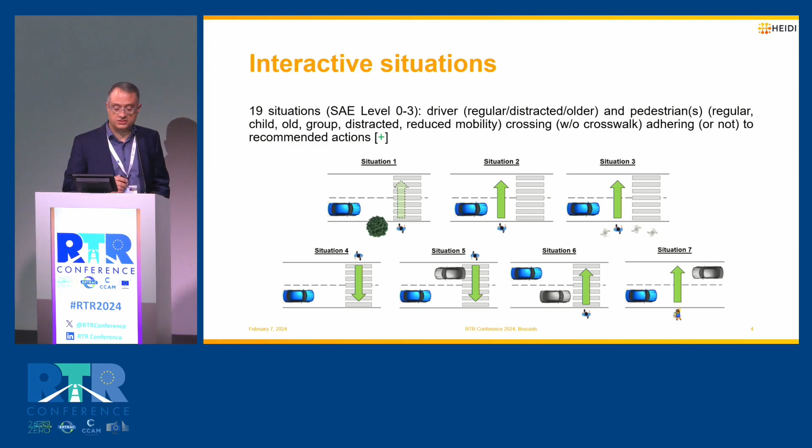So we also give the possibility to the agents to not respect what is recommended. So the system is resistant and resilient enough to be able to adapt and propose a new resolution of the situation. We also have produced concepts of HMIs, and we are now into the phase where we go less from the simulation side and more into the concrete implementation of prototypes. So what you see on the left is the concept for the internal one, what you see on the right is the first prototypes of the external one.

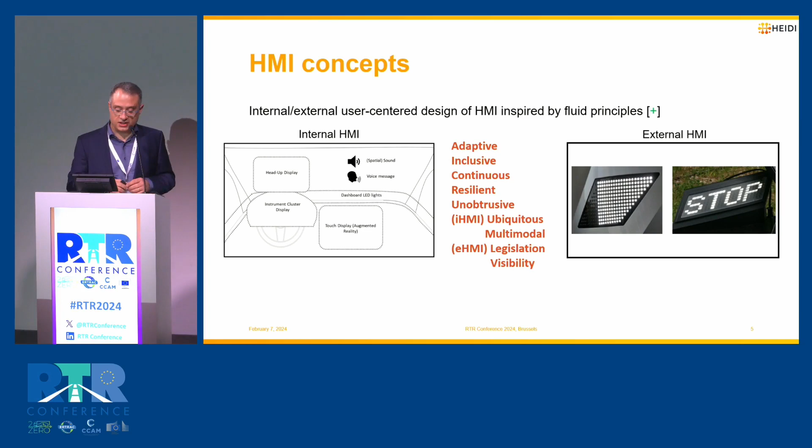Both sides have been designed to respect fluid principles of human-machine interaction. That means that they are all adaptive, inclusive, continuous over time, resilient, and unobtrusive. So they only provide information that is needed when it's needed and only if it's needed. With some differentiations, for the internal side, the system is also ubiquitous. It's a bit all over the place and multimodal. Whereas for the external side, there is a much more strict consideration for what is the current legislation and what might be the future legislations, especially in terms of visibility and reduced visibility conditions.

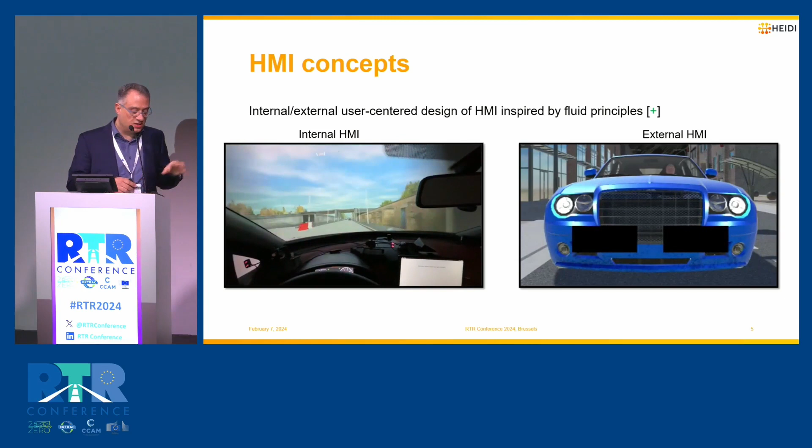Now, here you see short videos that show you the very first stages of virtual prototyping from both sides. So you see the multimodal system on the left for the driver that has head-up displays, LED lights, dashboard, etc. And on the right side, one of the many versions that are under testing of a combination of positions, display size, font size, visibility, etc.

Now, for the cooperative decision logic, so far we were working independently, internal and external side, because we had to understand what are the critical points, what are the critical nodes of the action, and how can each action develop over time, and all the deviations of that. Now, we are at the next stage where we are integrating that into the coordinated system.

So without going into technicalities, we have to take two things into account mostly. On one side, we need to be able to represent in the cooperative logic as many scenarios and variations as possible. On the other side, of course, we need to make it computationally feasible. So we are working on both sides, and we have some interesting results already.

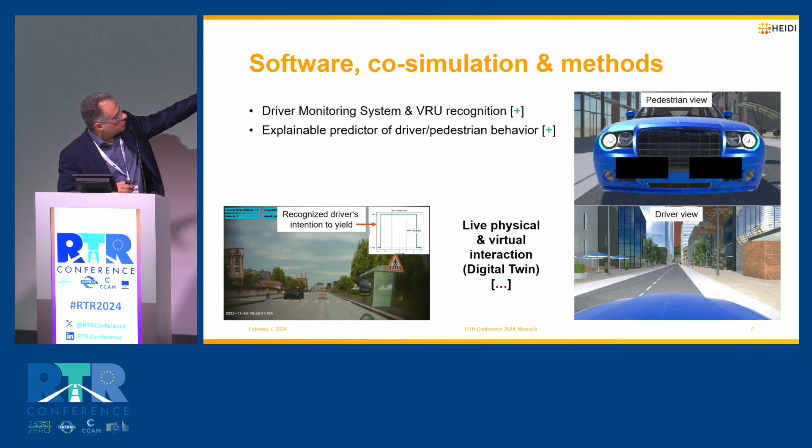Now, also a few words about the development of software, co-simulation environment, methods, digital twins. We have created a driver monitoring system that can not only detect the driver state, but also predict the intention of the driver. And also on the external side can recognize pedestrians and predict the pedestrian intention with explainable predictors in AI terms. What you see on the left side is, in this small corner, the predicted intention of the driver to yield when a pedestrian is about to cross.

And on the right side, you see both versions, the pedestrian view and the driver view. That avatar is actually a real digital twin of one of the project members. And what you can see is basically synchronizing time. When the pedestrian has the approaching car, he sees that the car sends a certain message. The message is interpreted, the pedestrian crosses the street, and the car moves on.

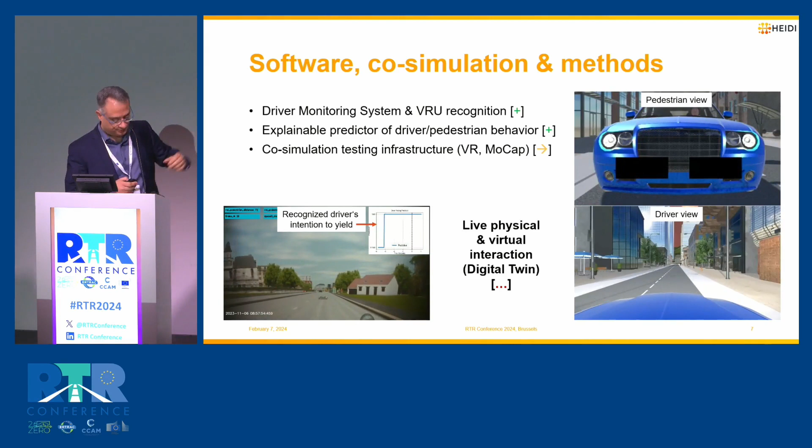Now, we have two more things in terms of software. We are developing the so-called osmotic software layer, that works as a wireless data exchange hub to basically take into account and coordinate all the information completely wirelessly from inside and outside the vehicle.

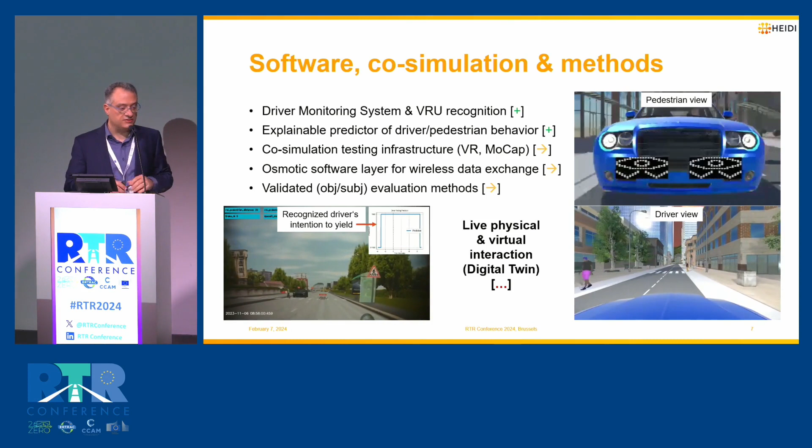And we also have validated some evaluation methods that work objectively and subjectively in both scenarios, so for real prototyping and for simulation environments. First results from a very small sample exploratory study show that we are basically going in the right direction, as we have pretty good subjective ratings of the different versions of interfaces we tested in terms of usability, acceptance, and perceived safety. And also we have objective measurements that tell us that the reaction time when we use our HMI for older or regular drivers is basically halved.

From the external HMI side, we're also well down the path of development, as we have now created a co-simulation setup, which I've shown you in the videos. We are defining all car parameters and refining the messages, especially considering the physical limitations of such a prototype in terms of, as I said, luminance, resolution, font size, etc., which is definitely non-trivial.

Coming to the impact section, dissemination, publication, as of course we are still halfway through the project, we don't have so much in that sense, but we have established a few important milestones. So first of all, we have established a yearly event that is taking place at our premises in Graz, Austria, the so-called Fluid Human System Interaction Symposium. This year we're going to host the second edition in June, so of course you're all more than welcome to participate. We have established an advisory board, putting together members from industry and standardization bodies, including ethics advisors.

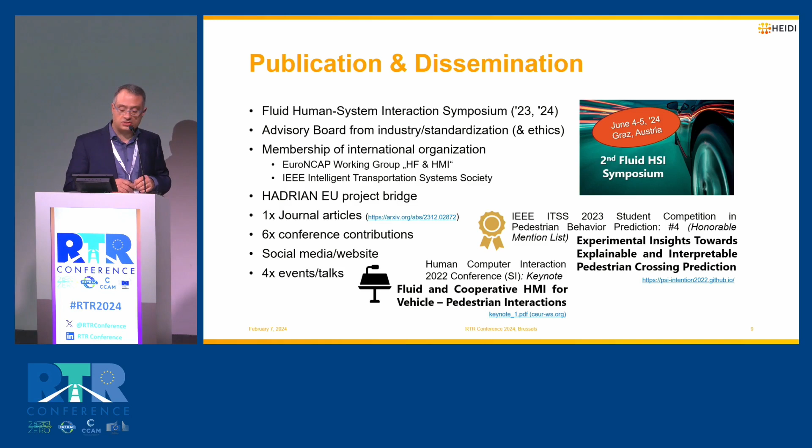A couple of quick remarks. We have an honorable mention of one of our members, University of Alcalá, which was ranked 4th in an international student competition for its pedestrian behavior prediction AI system. And we've also given lectures on the fluid cooperative HMI at the Human-Computer Interaction Conference.

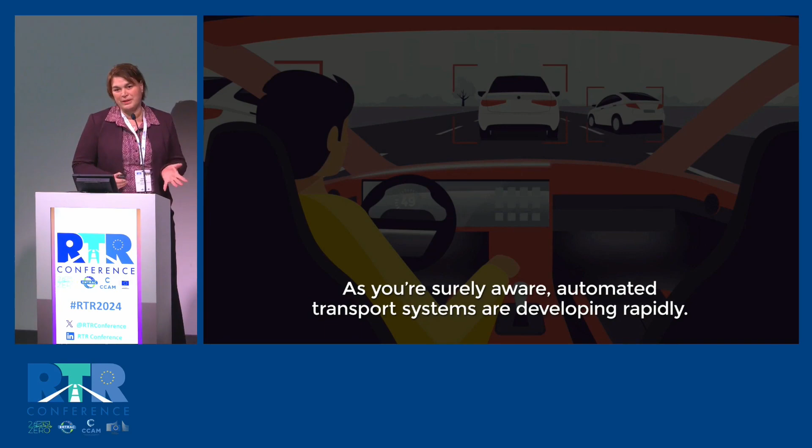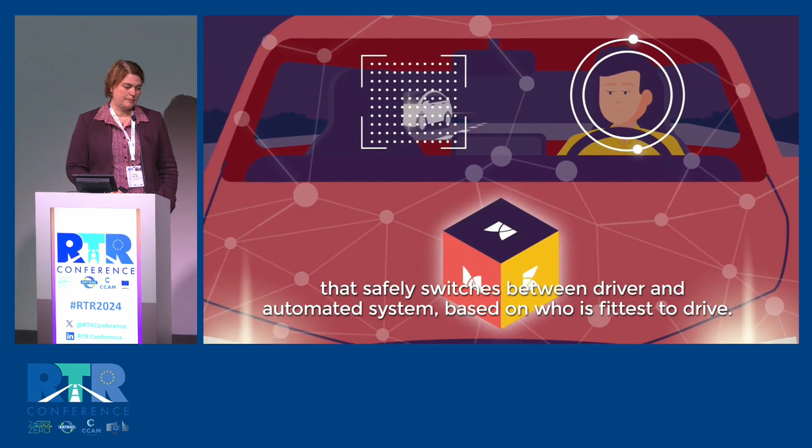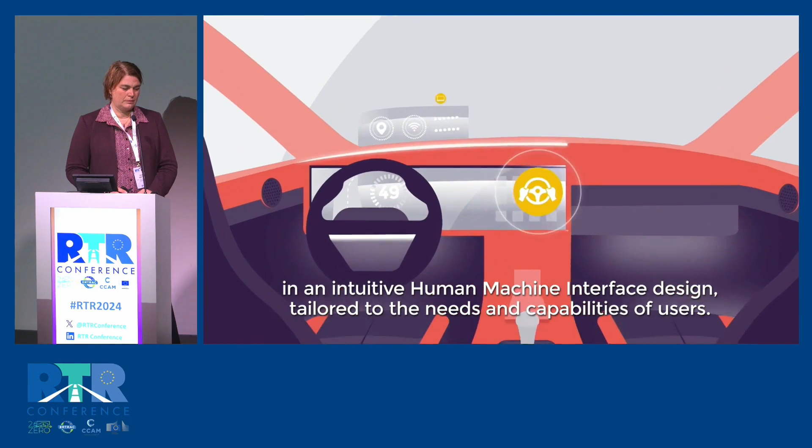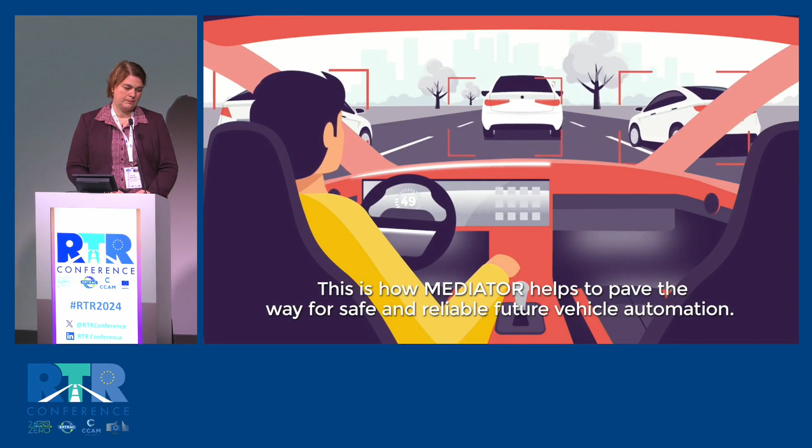As you're surely aware, automated transport systems are developing rapidly. No wonder, automation has the potential to improve the safety, sustainability, and inclusivity of traffic. However, higher levels of automation also introduce new risks, such as mode confusion and degraded performance. This is why a European consortium of highly qualified research and industry transport experts developed Mediator, an innovative mediating system that safely switches between driver and automated system based on who is fittest to drive. Within a 4-year project funded by the European Commission, Mediator has developed working prototypes and validated the system in a number of studies, including virtual reality, driving simulator, on-road studies, and computer simulation. The mediator system continuously monitors the driver and the automated systems and mediates between them while taking driving context into account. Mediator has adopted a user-centered approach, which is culminated in an intuitive human-machine interface design tailored to the needs and capabilities of users. Among others, we did so by supporting the driver's awareness of the automation mode by several cooperating elements, such as ambient lighting and LED strips. And the evaluation results are promising. Moreover, these results from the extensive testing of the mediator system are publicly available. With feedback from industry and policymakers, Mediator has developed guidelines for measuring degraded driver performance, guidelines for safe user-centered human-machine interface design, and roadmaps for further exploitation of the system. This is how Mediator helps to pave the way for safe and reliable future vehicle automation. More information, please visit mediatorproject.eu.

So that's in a nutshell, an overview of the project. For this presentation, we kind of reviewed all the results, and there's a lot after 4 years of hard work of so many partners. And we thought for this presentation, it's probably best to use the opportunity to share some of the main concepts we've been using that we feel, based on our experience, are worth taking further beyond the project, so maybe people can benefit from it.

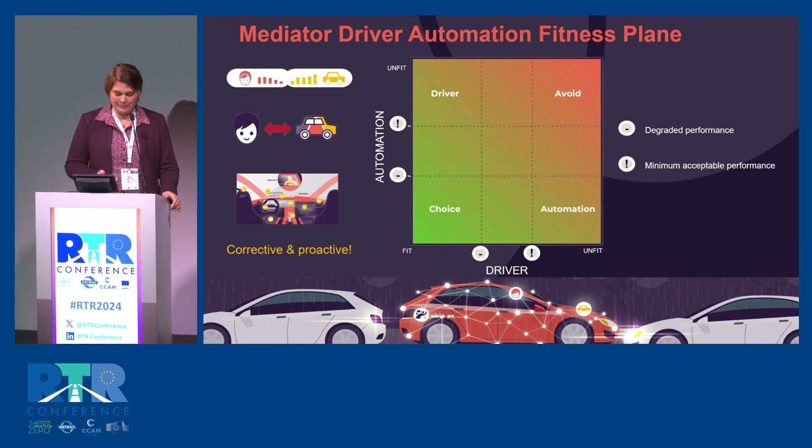And within that approach, we looked at corrective action. So when you see a driver is degraded, what can you do to kind of wake up this driver? But we also tried to find some preventive actions, to be proactive. If we know this is a condition where a driver is usually prone to fatigue, let's try to see if we can engage the driver already to prevent the fatigue from happening in the first place. So this is one of the main concepts underlying our mediator project.

So for today, we decided to focus on one of them, and we chose to focus on the holistic user-centered HMI design. So I will share some of the results from that area.

To start with, when we started thinking about this human-centered HMI design, we found it really important to take a holistic approach. So we think in this transition, what's really needed is to go beyond adding an extra icon on the dashboard. We should really take a holistic approach and look at the integral experience of the driver and use all the senses and opportunities. Well, not necessarily use them, but explore the use of them and see what would be the best combination to communicate what we want to communicate.

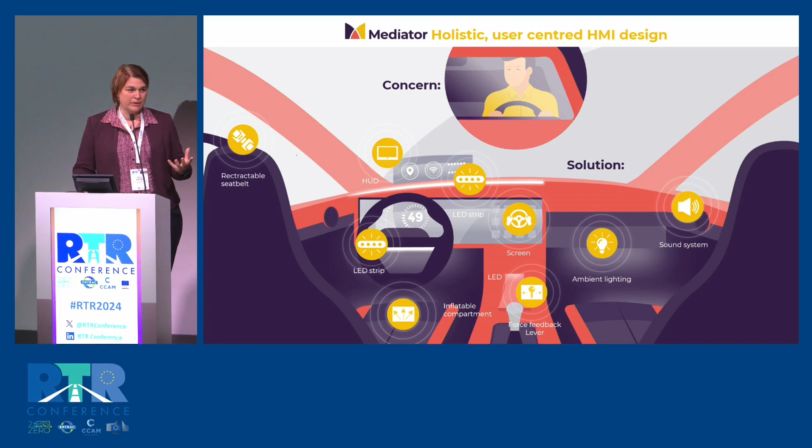So there were two key concerns that we found most important to communicate to the driver, what we think is most challenging in this transition. Because what we will see is that there will be different modes available in the vehicle during one trip. So therefore, it's very important that at any time the driver is fully aware of the mode he's driving in. And also the transition between the modes needs to go really smoothly.

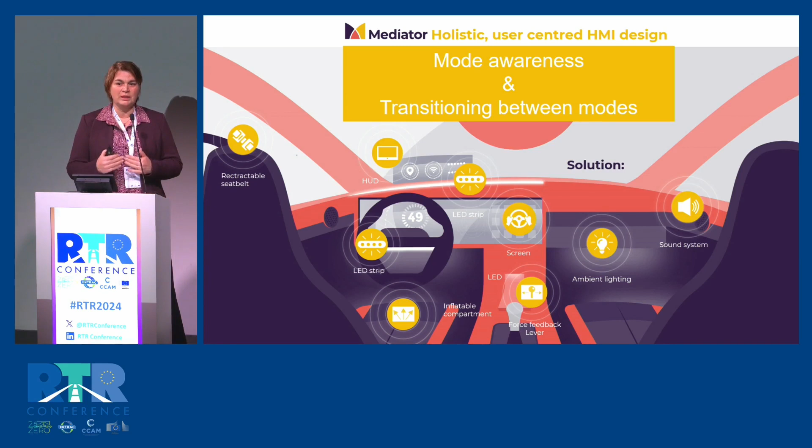So it's really technology-driven in a way that it clearly defines the steps of technological development and how new technology is introduced step by step, and how step by step also the role of the driver decreases. It's really taking the perspective that the driver does, let's say, the rest, the remaining task. But this remaining task is not necessarily what we as drivers are good at, or that we find convenient. So within the project, we thought we have to take the driver as a starting point: start with the driver skills and limitations, and see how technology can support.

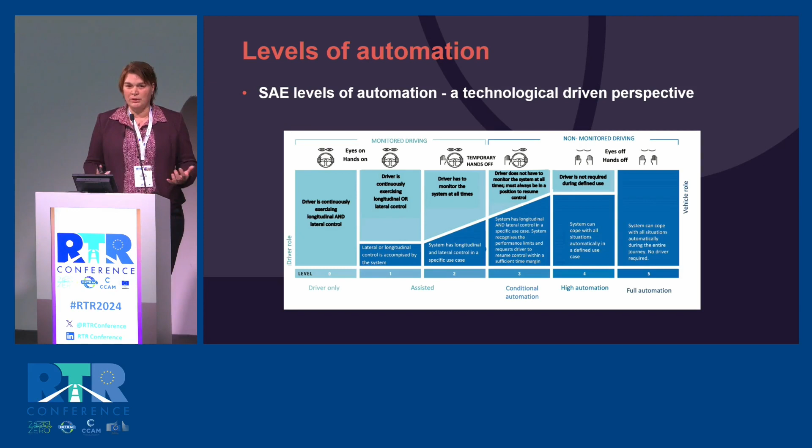So we thought it's good to focus on the development of an intuitive user-centered interaction and really take the human perspective. So the human has been the starting point, and from there we tried to define what's really most important to communicate to the driver. So from there we developed the MEDIATOR driver mode, and there were two key elements in this driver mode. First and foremost, it's most important that it's communicated which mode the driver is in at a certain moment in time, and what requirements are connected to that driver mode.

And there we thought actually there's only one clear distinction: either the driver is responsible in the end, or the automation is responsible in the end. In the first condition, where the driver is responsible, there could be all kinds of levels of support by ADAS kind of systems, but it should be clear that in the end, the driver is responsible. A second important thing is when the automation is responsible, the driver needs to know for how long this condition is available. That's what we call the time budget. The time budget indicates for how long the automation is available.

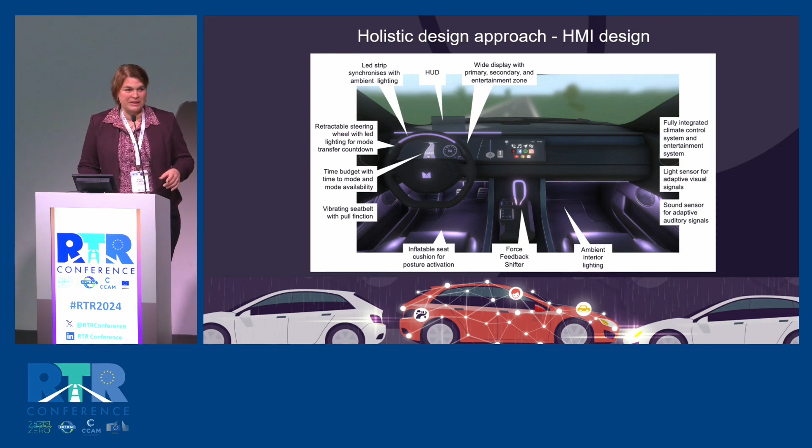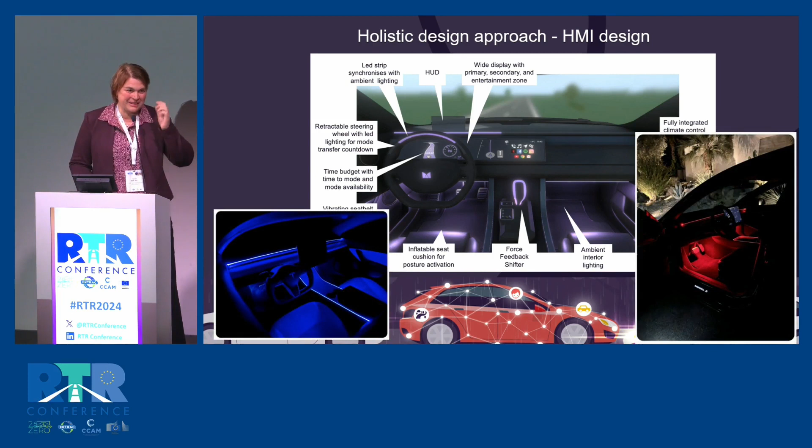It was also interesting that last week a friend of mine sent me a picture. She said this is the new Tesla Model 3. So it was interesting that there was very much a similarity actually between, well, their solution and our solution.

To develop the user interface, we took a design approach. So this is also what I think was really original, and also something that I think the field could benefit from more. So we started with the human factors knowledge that we have in the field. And then we asked the designers, based on that knowledge, to come up with creative solutions. And we did some, let's say, co-design between the designers and the human factors expertise.

And in different iterations, in the VR setting, we developed prototypes. And when we felt that was kind of mature and all the human factors knowledge was well integrated in this first prototype, we did further co-design sessions with the users. So we exposed the users to the interface design, and we asked them to think out loud how they interpret the different signals.

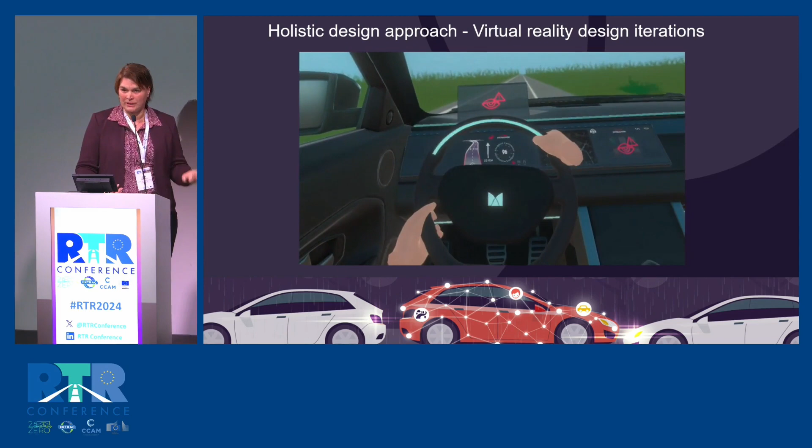And based on their thoughts, we could see to what extent our user interface was being understood, and we could adapt it. And in a couple of iterations, we could work towards a satisfactory understanding of this design. So this is one example, and well, I could talk for hours, but I only have 3 minutes left.

So we implemented all the developments we did in 2 driving simulator studies, 2 on-road testing studies. We did a VR study and we did computer simulations. And with all of those results, we did, let's say, a comprehensive evaluation of the concept and the implementation.

We learned that in terms of impact, we think this MEDIATOR concept is a significant step forward towards a safe transport system. It leads to a reduction in crashes, and we see a decrease in distracted driving, we see improved mode awareness, we see enhanced takeover rituals, we see support for drivers in self-regulation, and also mitigating the impact of fatigue. And overall, we got really positive feedback from the different participants, and we expect high acceptance and usability scores.

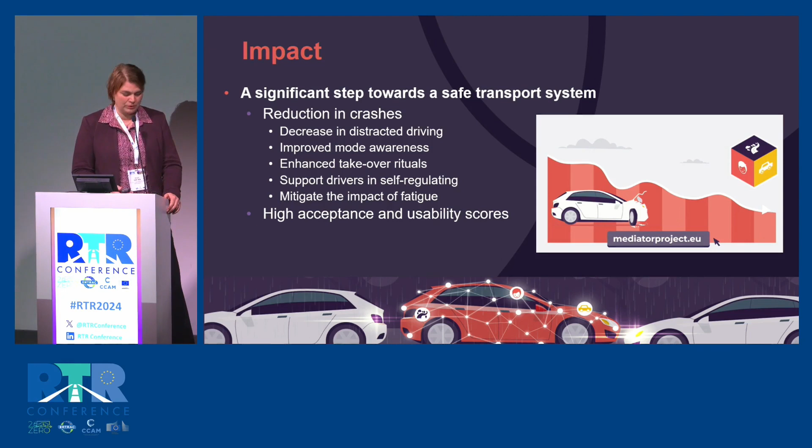So in conclusion, there's 4 main concepts that we think are worth further consideration. It's the MEDIATOR fitness plane, it's the MEDIATOR system concept, it's the MEDIATOR driver modes, which I think is a first step towards development of human-centered driver modes, and it's the holistic design approach and the iterative approach there.

So one final remark, also what we found during this project in the discussions between ourselves, there's really a need for changing perspective. Like I said in the beginning, the automation has much to offer to our society. It has the potential to increase the safety. It has the potential to increase sustainability. And it has the potential to increase inclusivity. But it's not bringing us there necessarily.

So if we want to get there, we should focus on these societal goals. So we should go from a transition which is driven by technology to a transition where the societal goals are driving the technology. So the societal goals should be our objective, and in the end, this technology is a means to an end to get there.

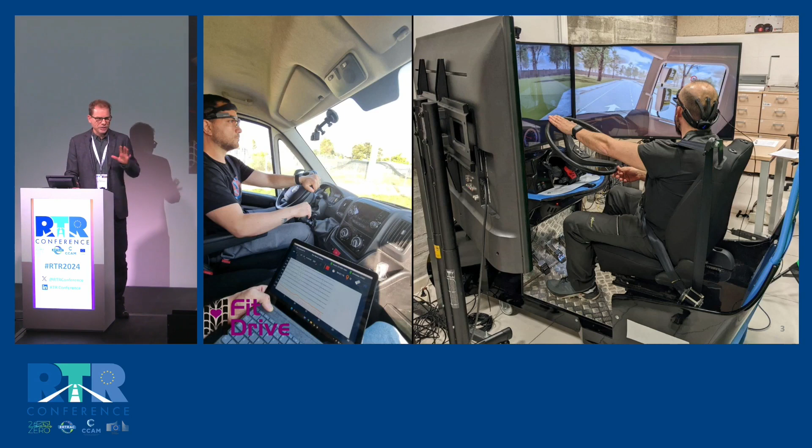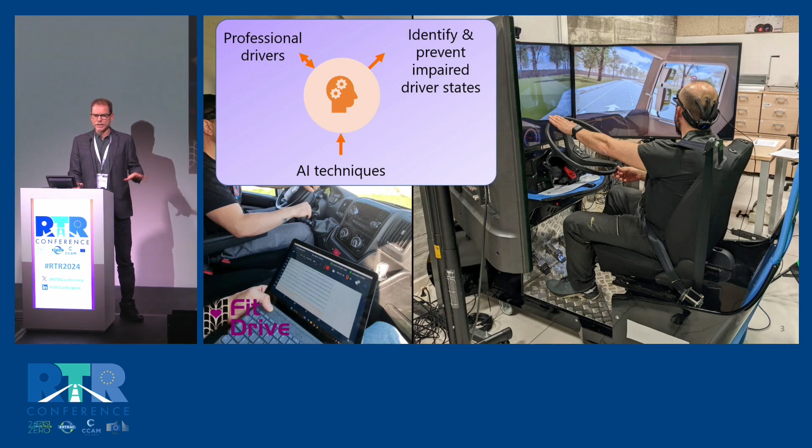So, quick view into one pilot, to set a bit what we were working on. You see a van driver with loads of sensors there measuring how he is driving, and also a simulator of a truck, in the same setting in a virtual mode. So we focus on professional drivers, mainly on van and truck drivers, as you just saw. We try to identify and eventually prevent impaired driver states. And we use AI technology to analyze all this.

So there are driving tests in simulators, also on the road on test tracks. And there's quite some literature out there, of course, on impaired driving states. We'll use this and then make a profile of the usual daily driving style of these drivers. And then, with the AI techniques, we can detect when a driver gets out of this personal driving style, which is an indication for impaired driving.

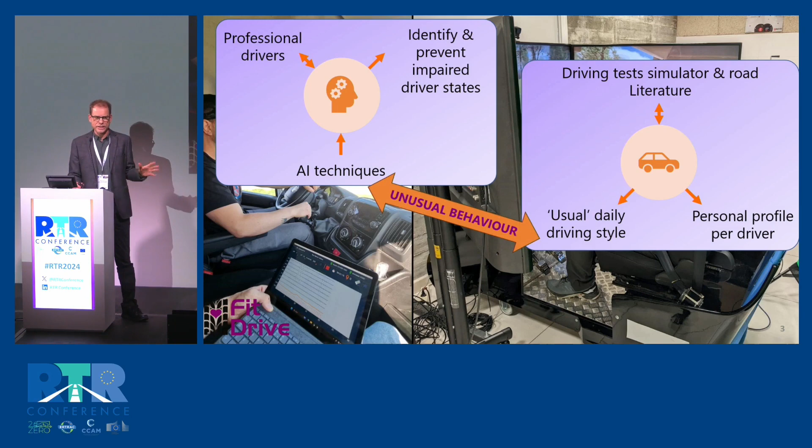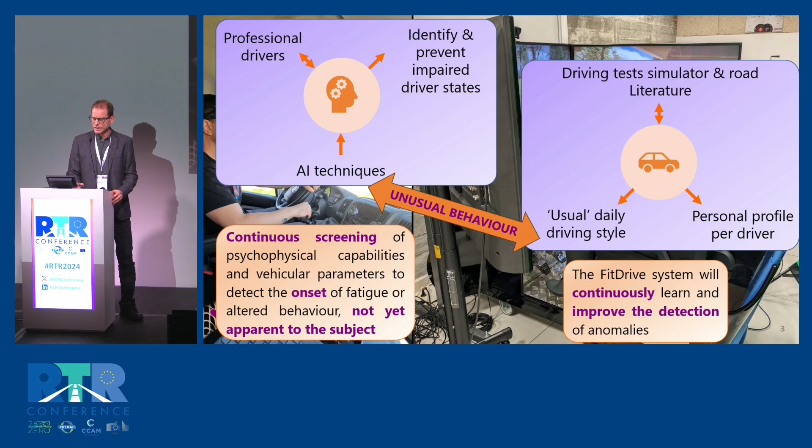So the system will then do continuous real-time screening of psychophysical capabilities and vehicle parameters, give an indication of the fitness to drive, to detect the onset of fatigue and other altered behaviors. The onset, so even before the driver notices drowsiness or whatever, we try to find some indicators to detect it very early and in a personal manner. And the system will then continuously keep on learning and adapting to changes in usual driving style to improve the detection of impaired driving.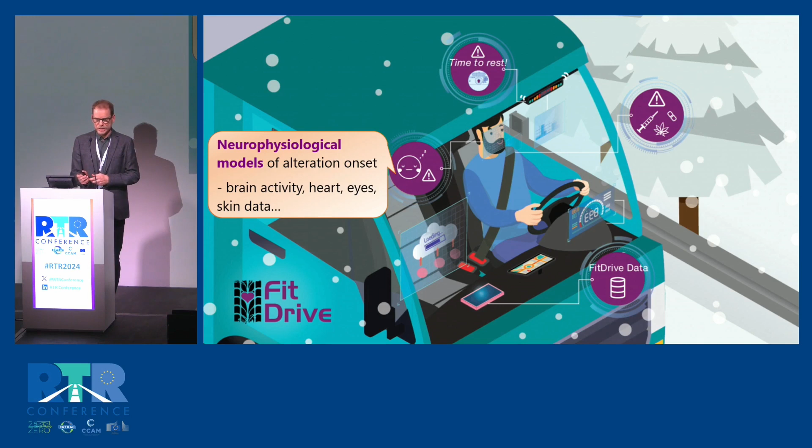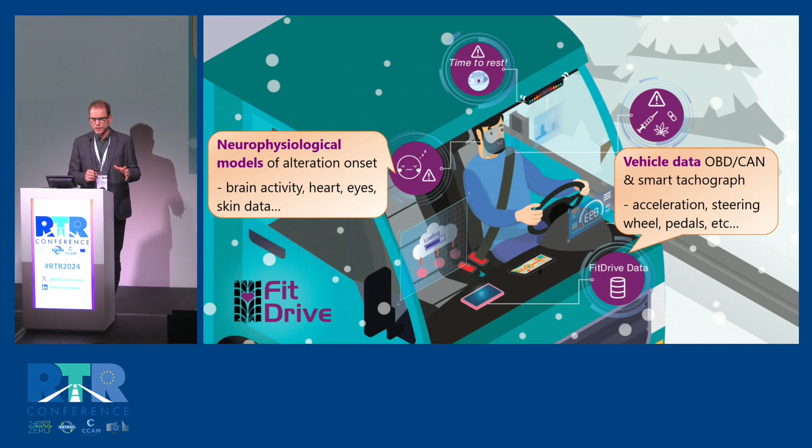So different aspects of the FITDRIVE system. There's neurophysiological models of the onset of these alterations with data from brain activity, from heartbeat, eyes, skin data, the sweating, vehicle data: OBD port, the CAN bus, and a smart tachograph, which is also being developed in the project, with indicators like acceleration, position of the steering wheel, the pedals, and also much more sophisticated parameters from the vehicle. There's a cloud-based AI system to detect these altered conditions.

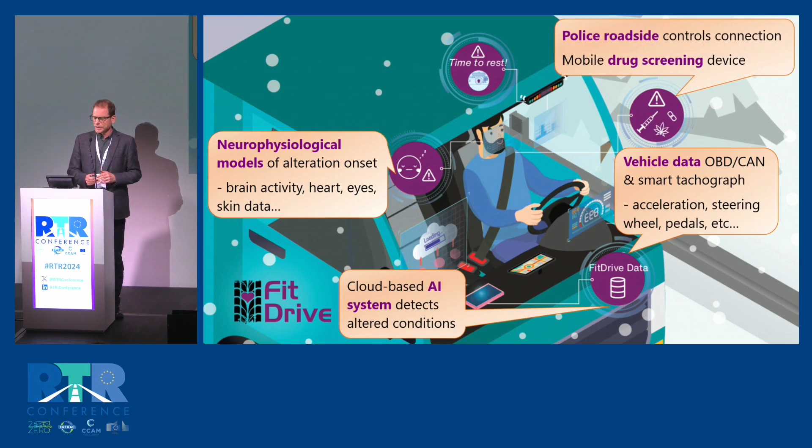And then there's, through the smart tachograph, a connection to police roadside controls. This can help the police to communicate with the vehicle and receive an indication of the current fitness to drive of the driver, so they can select which vehicles they want to stop and check. Another development is a mobile drug screening device for very quick detection of drug use, also used by police roadside controls. And we aim at contributing to the standardization of different levels of fitness to drive, and pave the way for fitness driving assistance systems.

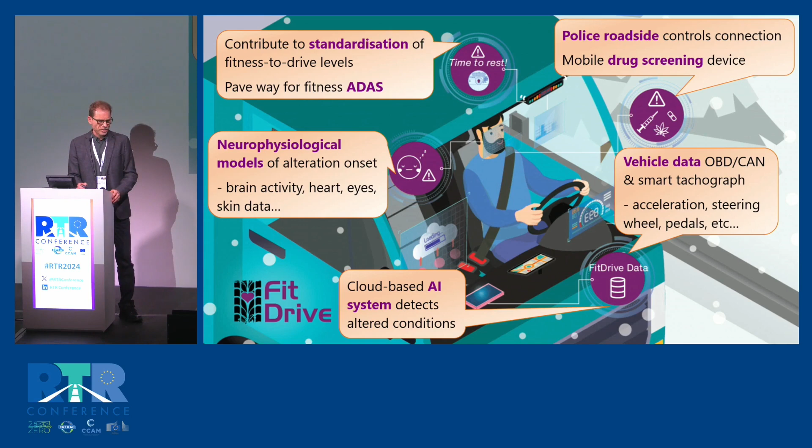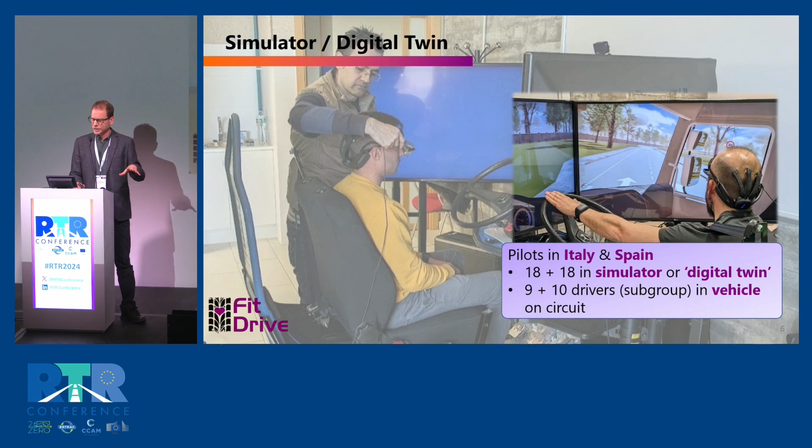So some preliminary results. As for a simulator and digital twin, you can name it like this as well. We can discuss about that, but okay. So we did pilots in Italy and Spain, in Rome, in Burgos, and in Leon in Spain, with 18 participants in each site in the simulator, and then on a test track on a circuit with actual vehicles, vans and trucks.

And this was a subset of the participants in the simulators. So the virtual circuit in the simulator was an exact copy of that circuit. We used 2 ITCL simulators there, coming from the SimuSafe project and the Mindtooth project. One was used for the van, and the other one was transformed into a truck simulator.

So, in these settings, we collect this data triangle, we call it. Actually, in the MEDIATOR presentation, we also saw a very similar thing. So data from the user, from the vehicle, and from the environment. We try to keep the environment as constant as possible and really focus on users and vehicles. The environment has, of course, influence on the state of the driver. At night you get tired more easily, but that is a cause.

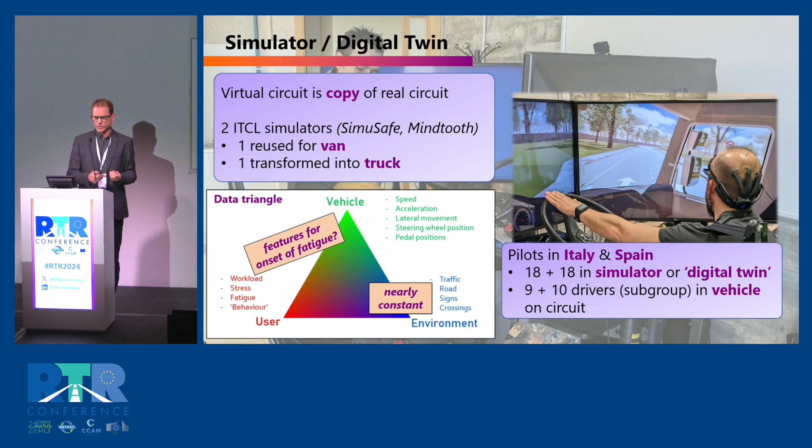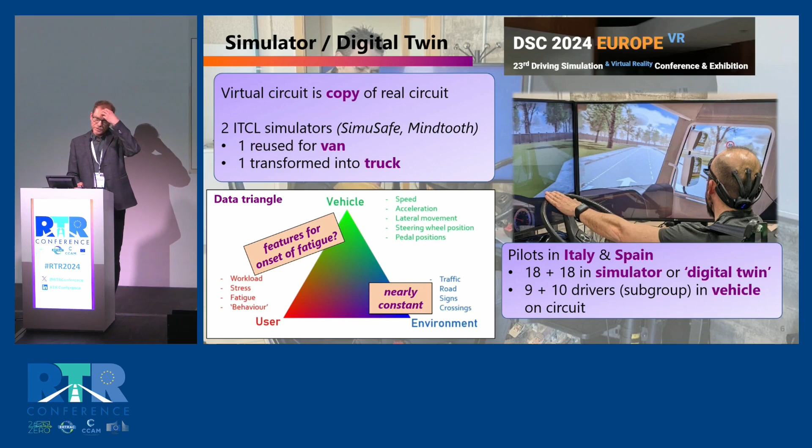And the symptoms of actual impairment to drive are noticed in the behavior of driving, and so data from the user or from the vehicle. Okay. So this is where we look for this onset of fatigue. And next September in France at the DSC, the Driving Simulation Conference, we will present this simulator and this data collection system.

Okay, so current status and some preliminary results. So in the tests for fatigue induction, we were able to do this. Actually, in the simulator in Italy, one participant fell asleep. We heard a bang of the head on the steering wheel, and he actually fell asleep during the test. So this worked very well. We saw that the EEG signals, the brain activity, is very good, gold standard. And it delivers a ground truth for your AI on what is fatigue.

And with input from literature as well, we try to correlate different features with parameters that you can obtain with non-invasive sensors. You don't want a truck driver with an EEG on his head driving all day, of course. So if you can relate it with heartbeat, for instance, then you have a smartwatch or a steering wheel with a heartbeat sensor in it, and you can use that one. And then from parameters that we have, make a selection of which features can give us indications on the onset of fatigue or other impairments.

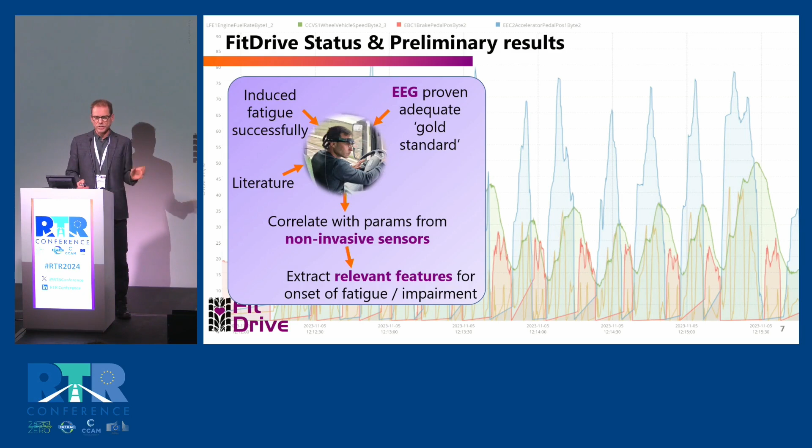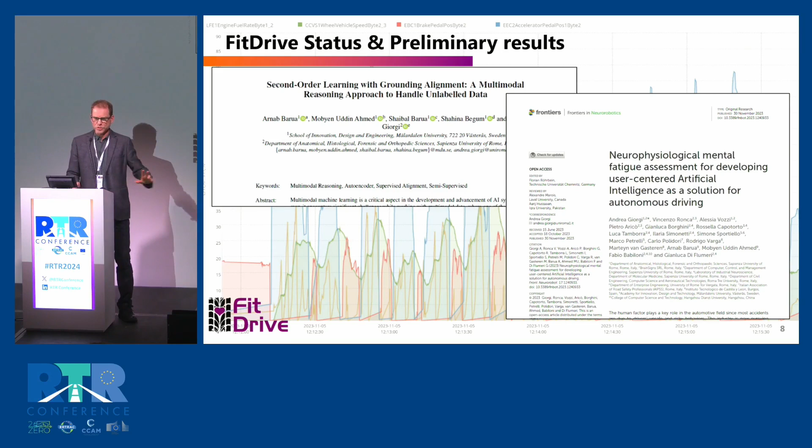So what is still coming up in the coming year is the personalization pilot. So we have drivers, new drivers, driving for 1 month in Italy, Spain, and also Ireland in this case, and do tests on the detection of unusual behavior. So this is work in progress for the coming year, as I said. And so far there are several publications already on this AI modeling we do, the neurophysiological measuring of mental fatigue.

And something we stress a lot, we work a lot on, is the need for standardization here. We need common criteria to measure reduction of fitness to drive. This is a message I want to convey today. This exists already for alcohol. You're allowed to drive with a certain promillage of alcohol in your blood. This does not exist for fitness to drive. So we need to have a good measurement and define what levels are allowed and not.

And put a mark here on the countries. For alcohol, there are different laws in every country. If a truck driver goes from one country to another, he faces different legislation, which we should try and avoid and have a common, at least European, standard on this.

So, most probably this will not be one measurement, like with alcohol in your blood. It will be several features, and then you can think of, if it turns out to be 5 features, you see this blue area, which is the allowed area. The yellow line would be a measurement of the current driver state. One value is outside the blue area, so this means some form of impairment.

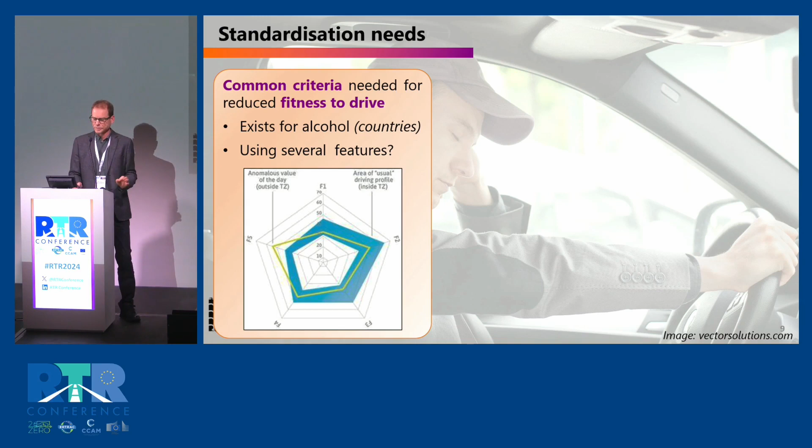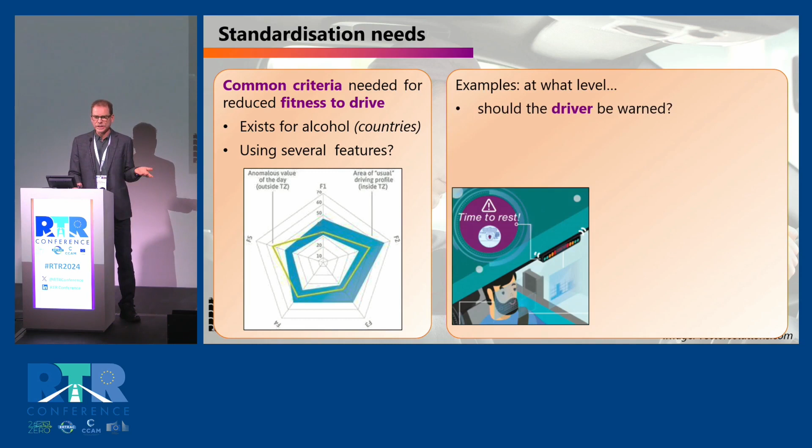So, some examples of the use of this fitness to drive standardization, what levels are allowed. Of course, the driver must be warned if fitness to drive is reduced. Also, police roadside controls, I mentioned already. The police need to know at what levels they should take action, stop the vehicle,

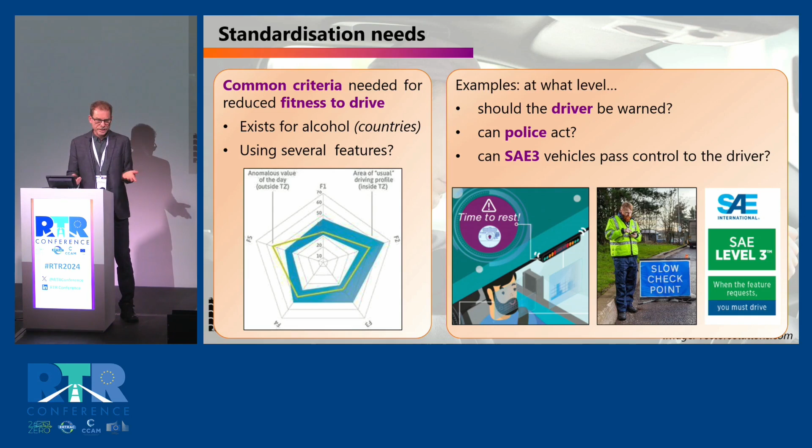or fine him or whatever. And also in automated vehicles at level 3, we saw before, so that the vehicle can decide to give the control to the driver. The vehicle must then know what the fitness of the driver is before; perhaps it should stop the car instead.

So, actions we've taken to promote these standardization needs. We organized 2 meetings at the European Parliament. They are working on the new driver license directive right now, and this includes fitness to drive. So we had discussions there. We conveyed the message, and well, we're a bit proud to have been there. Actually, it's very good.

Also the EUCAD exhibition in May last year, which was focused on automated driving, of course. TRA 22 in Lisbon with our sister project, Panacea. This is where we shaped this idea of standardization and driver interaction. We organized a side event at TRA 24 in April, a stakeholder event there, okay?

So, expected mid to long-term impact. Eventually, for professional drivers, we'll have AI models and a solution for detecting individualized onset of reduced fitness. And also, there's this new drug screening device, which has very quick measurements in less than a minute. Currently it's between 5 and 8 minutes to have a drug test, so this is a good time win for the police.

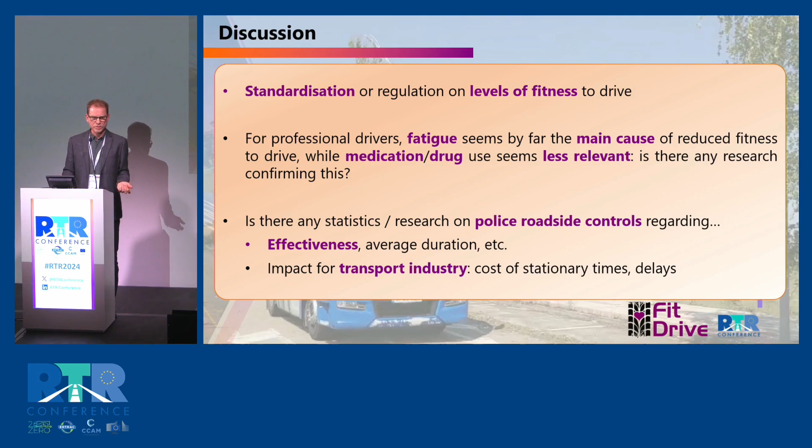Thank you very much, Martin, and thank you to all speakers for having kept their time. It means that now we have a sensible amount of time to discuss with you, and for this I will give the floor to Magnus. Thank you very much. Now we've seen different aspects related to the human factors. We've touched on this from various angles, and I hope that you are all fit to ask some questions, because that's really what we are here for now. So who would like to start? Let me see some hands, please. Yes, we have several hands. Do we have a microphone? Yes.

Yeah, thank you very much. I'm Jack Hotzinger, Toyota Motor Europe. Thank you for the presentations in the early morning. I have a question for Paolo on the HEIDI project. External communication to vulnerable road users, mainly pedestrians, I guess you were showing here. My question is, do you plan user studies on that? How it is perceived, how effective it is? Do you think about KPIs? Do you have practical design guidelines or something? Sorry, three questions in one. Maybe your picture.

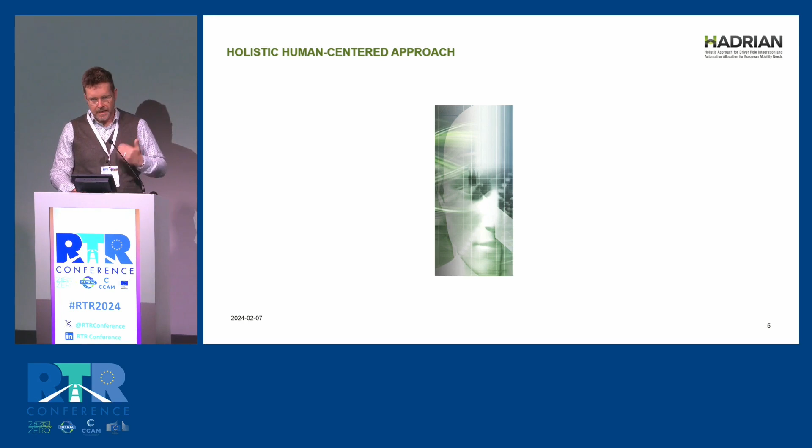So we start with the mobility needs of humans for automated driving in the near future. Then, of course, the vehicle has a critical part. In-vehicle solutions, HCI solutions, driver monitoring solutions are investigated in the project. But then, and this is really the key for our holistic approach here, we also integrated the road infrastructure, especially information about what is ahead of the automated driving vehicle,

communicating this to the vehicle itself through sensors, through C-ITS messages, and in this way expanding the prediction horizon, the viewing horizon of a vehicle, what the vehicle knows is coming up, and in this way increasing the predictability and also the availability of the automated driving functions. So we think that all three of these aspects together give us much better answers than just some of the components. So this is our HADRIAN, which stands for holistic approach, and the long text you have there.

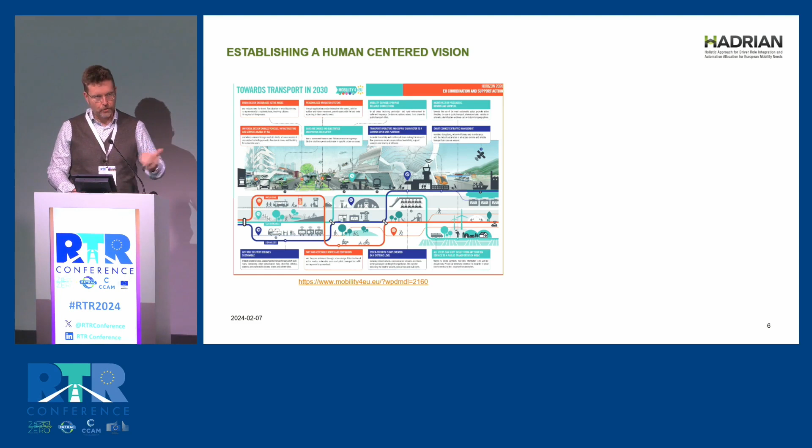So we start with the human-centered vision. This is our crystal ball. How will automated driving be usable in the near future, in the next 5-10 years? There are many visions available, many ideas, roadmaps where the European Union, where Europe, where countries and cities want to go. We read many of these visions and extracted from these visions specific use cases. So it's a user-centered approach. We have personas involved. We identified 3 different personas.

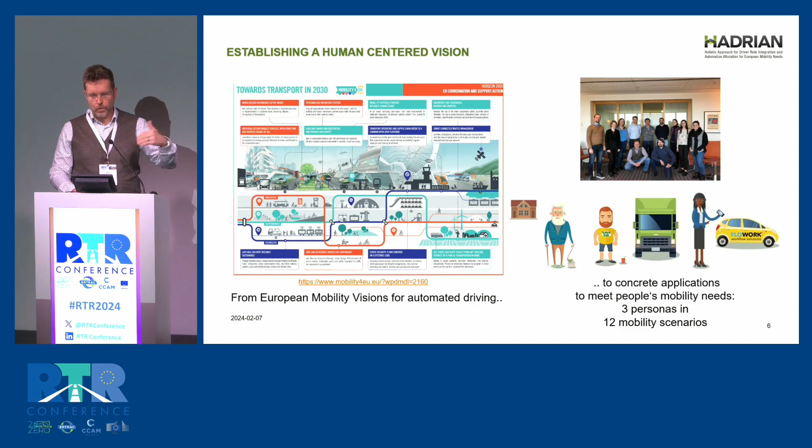One, an elderly driver who wants to stay mobile with automated driving functions. We have a truck driver, because the job as a truck driver is not as attractive anymore as it used to be. So how to increase the attractiveness of this job environment. And then somebody who wants to work in the vehicle, somebody who needs to be productive while being on a trip. So these 3 personas form the core extracted from these mobility visions.

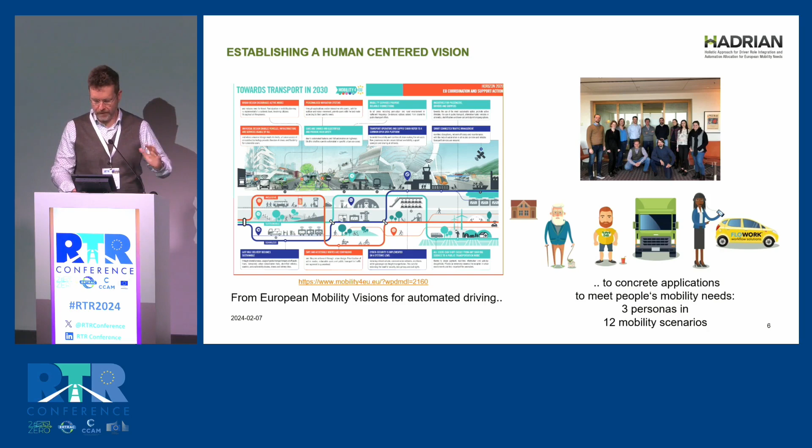And then for this we created 12 mobility scenarios. These mobility scenarios were extracted for urban environments, suburban environments, rural environments, and also ride-sharing environments. So these 12 scenarios really form the backbone of the project, because they give us the goals, what the mobility needs are, and how we can address them with these different types of automated driving functions. So this was the start, at the very beginning. Now this is at the end.

Most of the research in the HADRIAN project, but not all, since in the end we come to the field demonstrations, was conducted in driving simulators. We had overall 22 studies across Europe and Turkey with more than 800 human participants. And we described thoroughly all these studies, which are available on this link, and you will have other links later on where you find them. But what did we do?

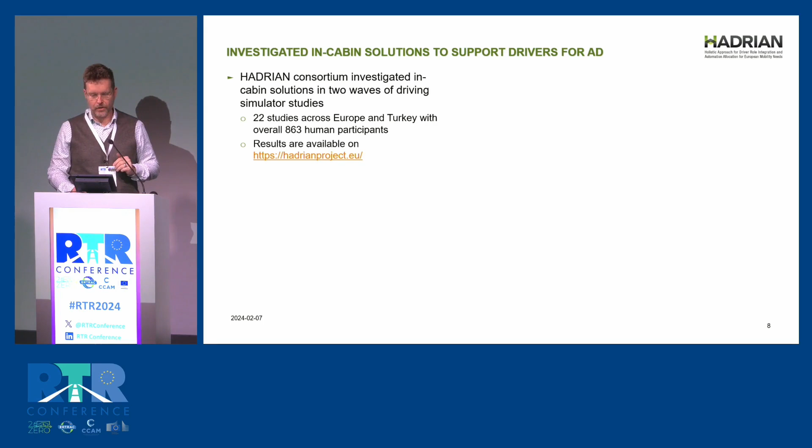So just some highlights. One is we looked at seat repositioning as one way to communicate a change of automation level to the driver. We found this to be very intuitive if you do it right, if you have the right angle. For example, we tried seat inclination, but seat inclination didn't work so well. So a seat angle of about 15 degrees was found to be a very effective way, if integrated with other solutions.

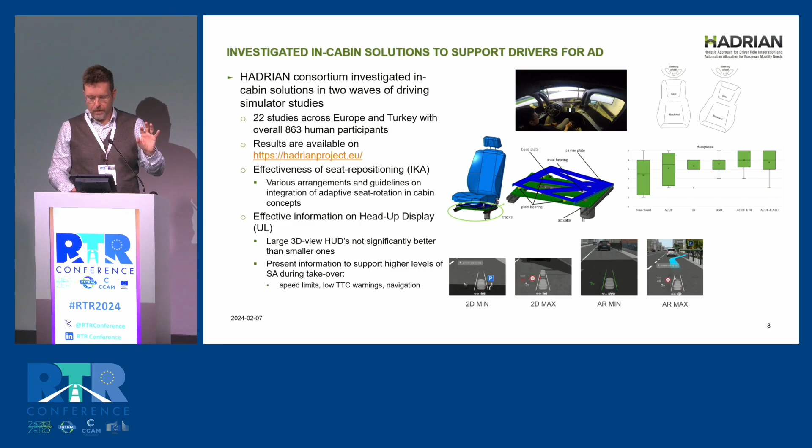You can't just turn the seat, of course, you need to integrate it with other display solutions, especially auditory alerts, and so part of what we tried to show is how you can integrate each of the single innovations, here seat rotation, into a comprehensive cockpit layout or vehicle cabin layout. A second piece we looked at were head-up displays.

Head-up displays are becoming, of course, available more and more. It's prime real estate for seeing information, getting information. We were interested in some of these large augmented reality type displays where you have information that actually overlays into the real environment and seems to really augment what you see out there.

We didn't find, interestingly, such big benefits of having large head-up displays that have this integrated view. We found head-up displays were highly appreciated, especially the information you see there: speed limits, time to collision warnings, and navigation information. So we investigated what information was most beneficial to be displayed, as the minimum, on such head-up displays.

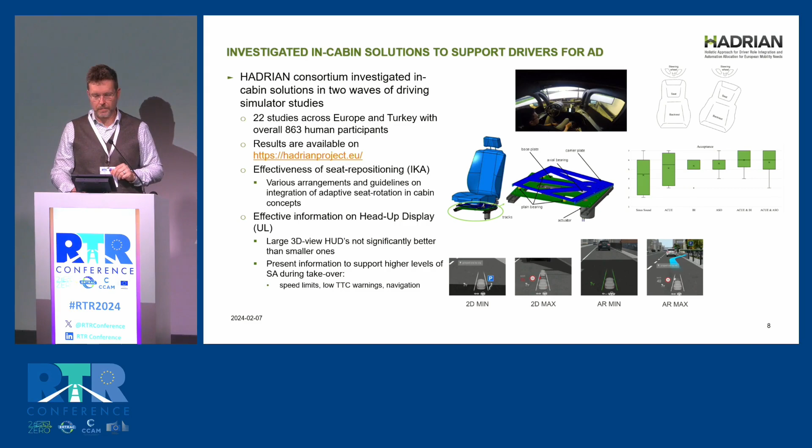We looked at different driver state-dependent haptic feedback, looking at different signals that can be communicated from the steering wheel, for example, a state change for a takeover request and so on. What haptic symbols are most intuitive to be perceived, to be used by our drivers? And lots of possibilities out there, from intensity, the shape of the signal, and just different ideas. It's an almost infinite universe. So we looked at a lot of those, and we found some that clearly work better than others. And so we reported on those, and we used them then in follow-on simulations.

What we also did, beyond haptic displays, and this is a use case you can think of for an elderly driver, we called it the guardian angel assistant. So it's really a vehicle that has automated driving functionality, but uses this in the background, leaving the driver in manual driving mode. So an elderly person may not necessarily need to disengage from driving, but needs to be supported maybe in some situations to compensate cognitive, motoric, maybe some decrements in performance.

And so there we developed this guardian angel adaptive force feedback on the steering wheel that adjusted to the level of the driver, giving strong force feedback, avoiding an obstacle when the driver was distracted, being less strong when the driver was attentive. So it was driver state-dependent interventions in terms of keeping a safe envelope of the vehicle.

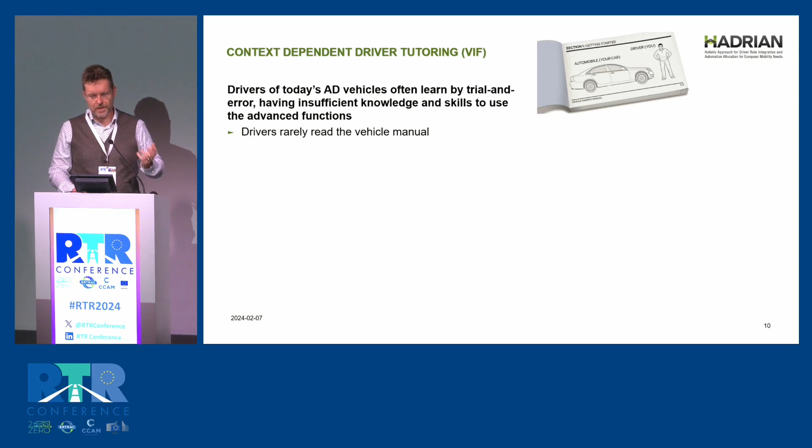What we did to address this, we developed a tutoring application that on one hand explained in a multimedia format, so in videos and audio, the responsibilities, the tasks of the driver, the tasks of what the vehicle does, when it does it, how to engage, disengage, and so on.

But even more important, and maybe the most important feature of this system, was that it was combined with the in-cabin driver monitoring system. So it was able to adjust to what it observed the driver to do.

So a driver, and we heard this yesterday, when the driver was too quick in taking back control, because it was just a 2-3 second fast response after a takeover request, the system would afterwards explain to the driver, okay, good, but next time, please check the rear view mirror, look outside, and learn to do this in a safe way.

This would be in the initial tutoring already, but this would be adaptively giving feedback to drivers. We were a little concerned, would drivers really like that? But in fact, when we gave this dynamic feedback, only the drivers who did not perform this takeover in a safe way, or at least timely in a safe way, would get the feedback, so it would not annoy them after a while, so this was important.

They changed their scanning behavior, so during the takeover they looked much more outside, on the road itself, so they focused more where they should focus during the takeover. But they also gave us feedback that this helped them reduce ambiguity, because they received feedback from the system on whether they were doing something right.

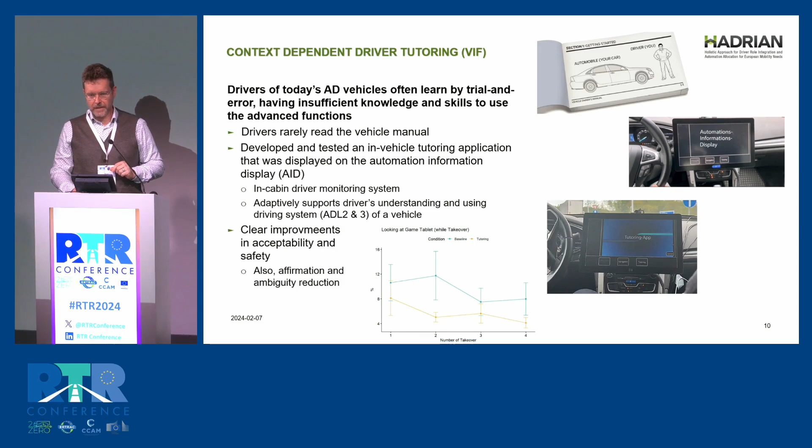Now let me go to the HADRIAN demonstration. I must say, I was very glad that it was a requirement in the call that we had to not only do the research in our simulators, but actually bring them into the field and show how this works on actual vehicles, on test tracks, but also on open road environments. It was a big learning experience, bringing what you can relatively easily do in a simulator and making it realistic enough in a real vehicle with a real automated driving functionality.

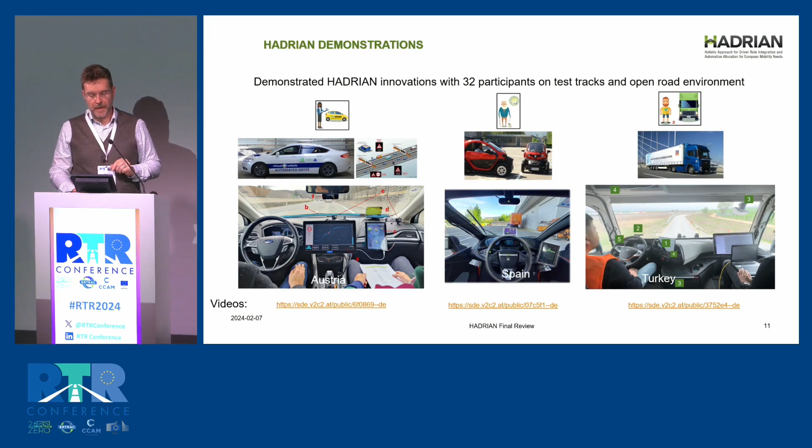So we had 3 demonstrations, in Austria, in Spain, and in Turkey. In the following slides, I will briefly talk about the first one, in Austria on an actual highway. You see the use cases addressed. I have the working in the cabin use case as main guide in this demonstration. So we implemented the innovations I presented before. You see them on the upper right screen.

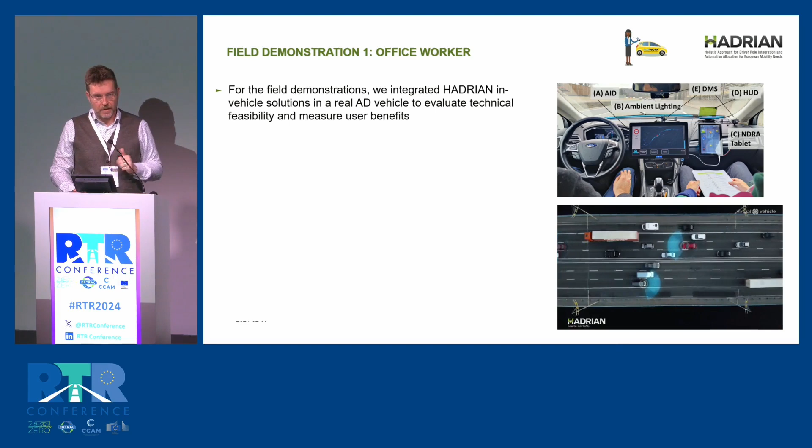So here we integrated these cabin solutions in an actual vehicle, and we had 2 versions of our vehicle. One was the standard configuration without these innovations, just automated driving with standard features, and we compared this with a configuration that had all these features implemented. Now, what were the important features I've not talked about before?

This vehicle we integrated with C-ITS messages from the roadside road information infrastructure. That means road closures were available to the automated vehicle before it would pick anything up through its radar and LiDAR sensors. So the vehicle receives a message from the roadside and is then able to plan a controlled transition, giving 15 seconds or more during level 3 driving to the driver to take back control. So we increased the predictability of level 3 driving through integration with the actual C-ITS infrastructure.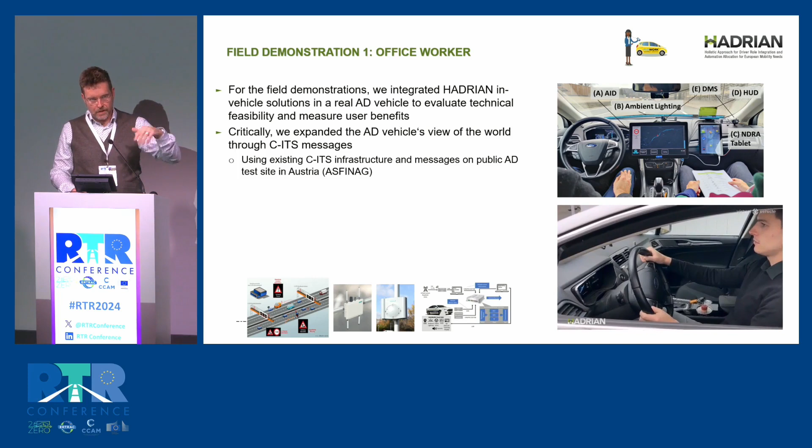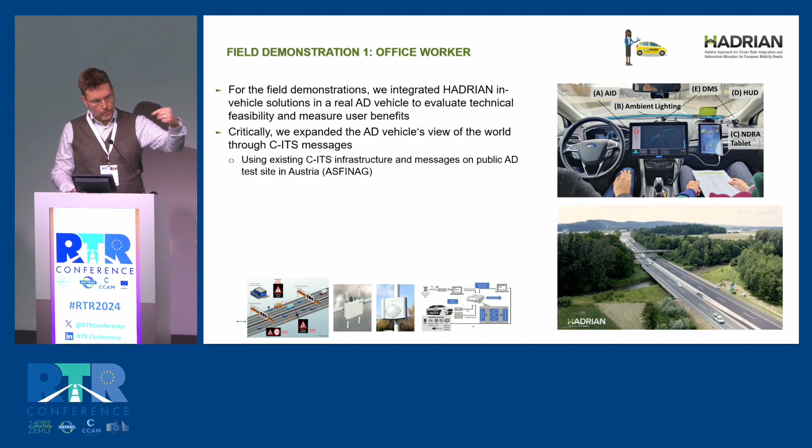Now, these messages are not new messages. We use messages that are available. The C-ITS infrastructure is available on the segments of this highway as of today, and has been for the last couple of years. So we use these existing messages. The integration was really to take them in the vehicle, process them, and inform the driving functions as well as the driver about it.

We also predicted the expected SAE level 3 duration. So you can see on this display the parts of the road where level 3 driving would be available. Based on different types of messages, the driver would be informed where level 3 driving seems possible today. It may change, right?

But due to constructions, other things, but they would be available. So predicted availability of the expected level 3 driving, and then also, and this is also new, in level 3 automation, automated driving level 2. At level 2, we don't have any warnings. The driver is supposed to monitor permanently anyway. So we gave a 5-second time warning prior to level 2 disengagement to see what impact this would have. Because drivers often don't do the monitoring they're supposed to do.

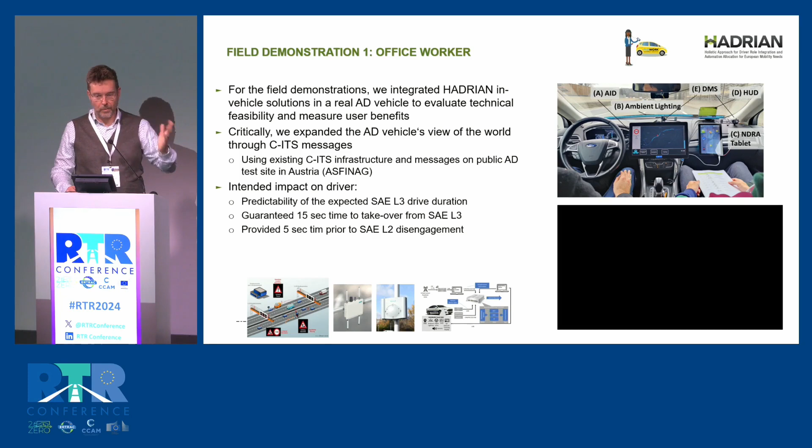So this is what we found. Overall, we found very clear benefits of the HADRIAN innovations. Safety, perceived joy of performing a non-driving related activity when you were actually knowing how long you're going to stay at level 3 driving. Usefulness, assistance quality, and the display quality.

But maybe, and this is the key message, also in terms of impact, the most important three features were increasing the predictability of AD availability, so the driver knew where to drive, how long to drive at level 3, the planability, being able at the beginning of the trip to already know where this could be performed on the longer trip, what kind of activities they could perform. And then the third piece is monitoring the driver and giving adaptive feedback when the driver was not performing as he or she should be.

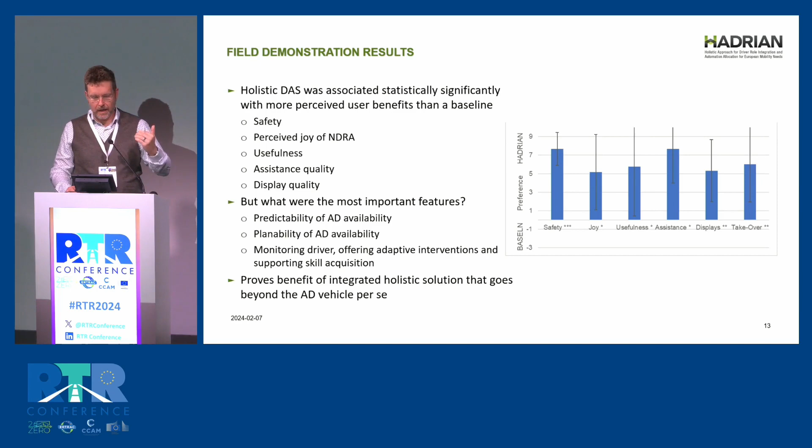So this was for us the biggest takeaway, that such integrated holistic solutions go way beyond what we had expected from separate solutions, or just HCI solutions that happen in the vehicle itself without actually expanding what is an automated driving vehicle.

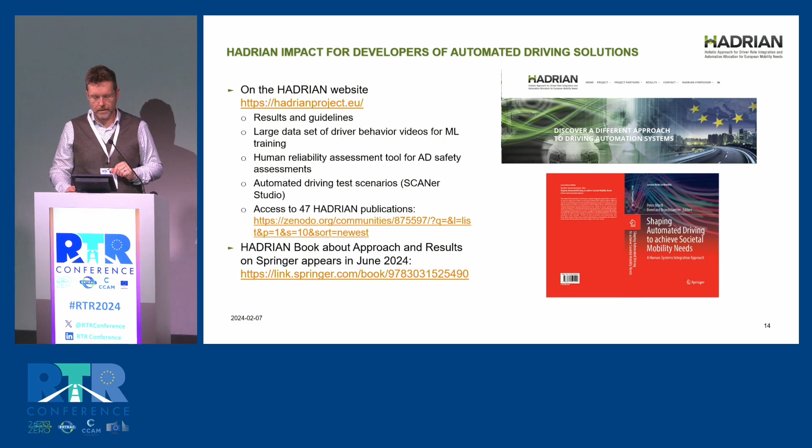So my last slide: we have investigated a holistic approach to render AD useful for societal mobility needs. We understand relative contributions of what you can do. And for us, the key is this holistic approach of expanding the solution beyond the automated driving vehicle, going much larger and integrating, for example, road information infrastructure, making this really an integral part of what represents an automated driving system.

We find it is maybe difficult to do this in current ecosystems of how automated vehicles are developed. I think we need to bring together, to an even greater extent, the different expertise, organizations, funding mechanisms, education systems, recognition systems, from more isolated, specialty-driven systems to more integrated systems. I think this is a challenge to really make these promising solutions reality: creating systems engineering landscapes that allow us to build these larger systems versus the isolated systems that we are still currently very much investigating.

Hi, everybody. I'm Silvia Chiesa, and now I'm going to present the NextPerception project. Just two words to present the overall project. NextPerception started in May 2020 and ended this September 2023. As already said, it's part of the ECSEL program.

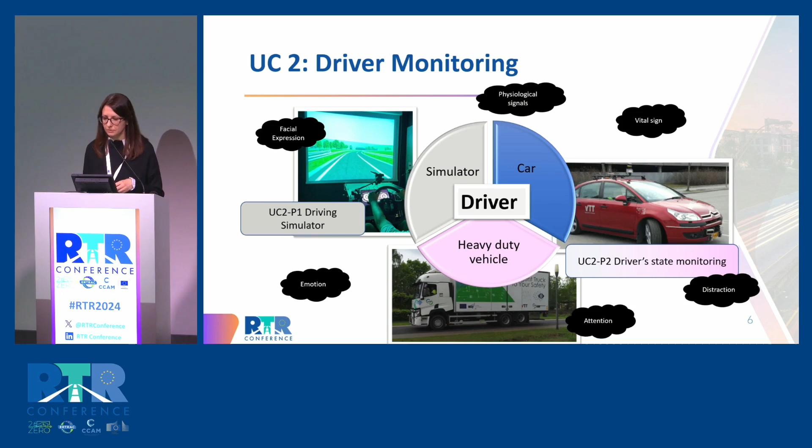The second classifier collects information from a lateral camera and a frontal camera, and it's able to understand the distraction, the movement of the driver inside the vehicle. In particular, it focuses on the steering wheel and on the central display, and it is able to understand, for example, when the driver is using the smartphone.

The third classifier is the emotion detection classifier, that focuses on the facial expression of the driver. In this case, focusing on different points on the face of the participant, it's able to understand the facial expression, so the emotion felt by the driver.

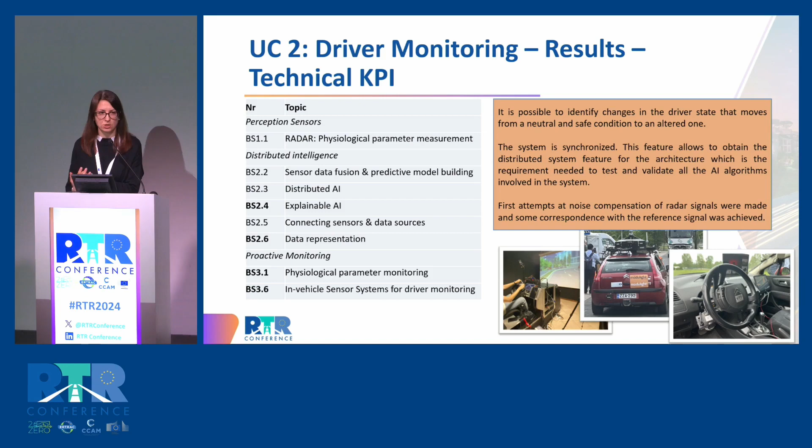Regarding the technical KPIs, we have been able to synchronize all the different modules, and we have been able to understand the real distraction, the real status of the driver. As already said, we tested the system with a lot of users. Generally, they report a good opinion, good acceptance of the system and the monitoring. We investigated in particular the messages and the output provided by the HMI, the interface, and they reported good acceptability, good usability of the cluster.

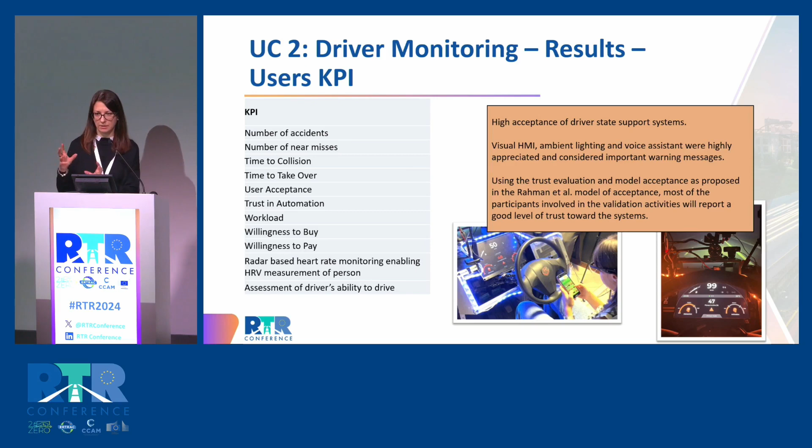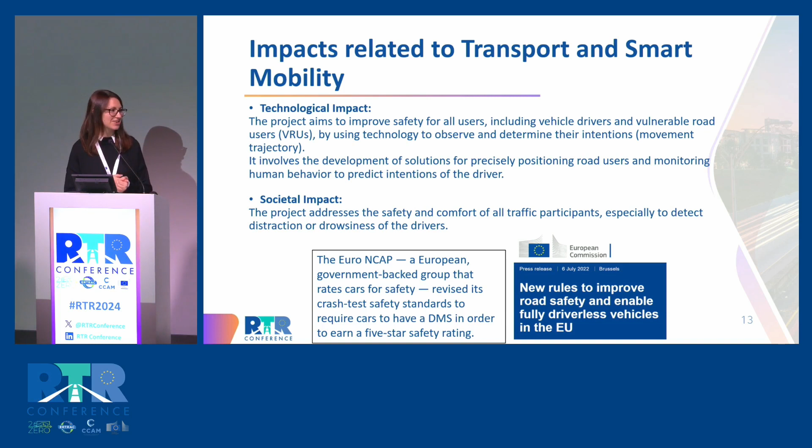So these are the main results obtained in this project. Of course, we can improve the systems developed in the project, but generally we obtained important results that can be implemented on a real vehicle, even because we have to consider that driver monitoring systems will be mandatory in the next vehicles that have to be produced. So these are the general results obtained. The project, as already said, ended in September 2023, but we will have a follow-up of the project because we are going to start with the same partners another project named Distremuse. So maybe you will see the next step of the project. Thank you.

Thank you, Silvia, for your indeed very nice presentation. I like your presentation, the view from the smart perception sensors to be applied to the automotive sector, also because you look not only at the driver, but also the passengers and also the outside people, the vulnerable road users. We'll now come to the Q&A session. My colleague Magnus will manage this session.

Yes, thank you very much. And again, different aspects, but also things we, in one sense, heard before, but looking at the technologies that are needed, looking at the implementations, looking at the take-up, and so on. So it fits very nicely, I think, into the 3 projects we had before the break as well. So, questions? Natasha?

Thank you. Really interesting 2 presentations. Driver monitoring is definitely the hot topic. So to Silvia, I was just wondering if you can say a little bit about your cognitive distraction task and how you separate the visual manual element of that from the cognitive task.